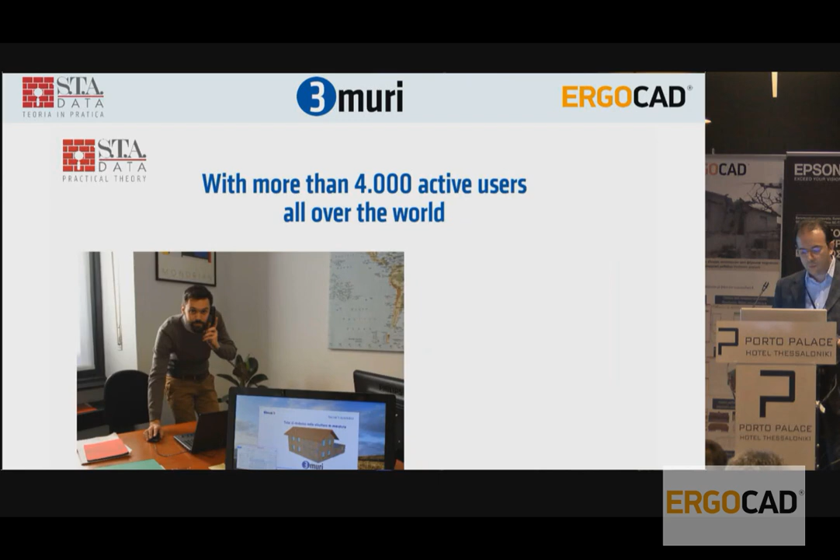Stadata was founded in 1983 by Adriano Castagnone, civil and structural engineer since 1978, and pioneer of scientific software for structural engineering. The company was born to provide civil engineering services and consulting. We have always had a particular interest in the evolving sector of IT, foreseeing the enormous opportunity of applying it in design and computation. Before focusing on software development, Stadata realized important projects both with private and state-owned companies.

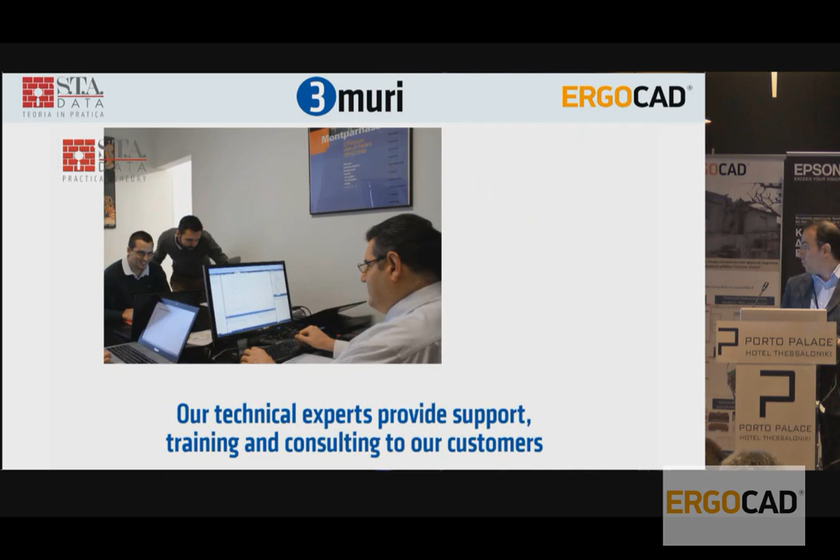That's our strength, because beside IT experts, we are professionals in structural design. The company is currently composed of 15 employees and several consultants, all highly professionally qualified. Thanks to the continuous development of work and collaboration with the university and professional world, it is always able to offer advanced and constant updates to its customers.

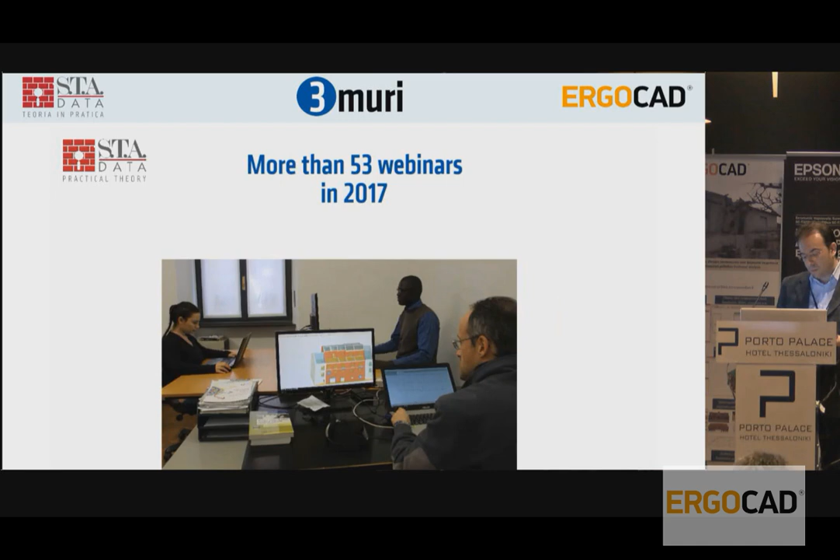Stadata applications allow you to face everyday work with simplicity and effectiveness. The company goal does not end with the search of new IT solutions. The offer of Stadata includes support, training and consulting services, including individual projects, so that the professionals are immediately operational. Thanks to the technical expertise and the state-of-the-art solutions, Stadata is a solution to the real problems of designers.

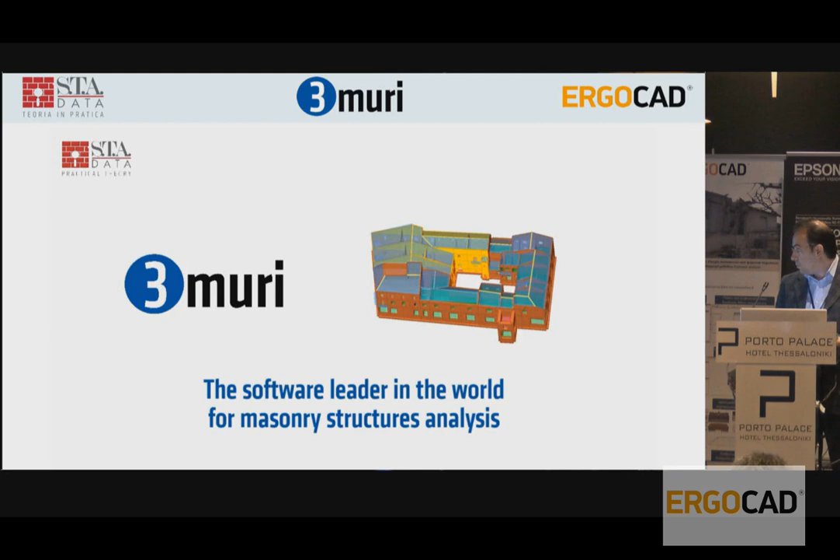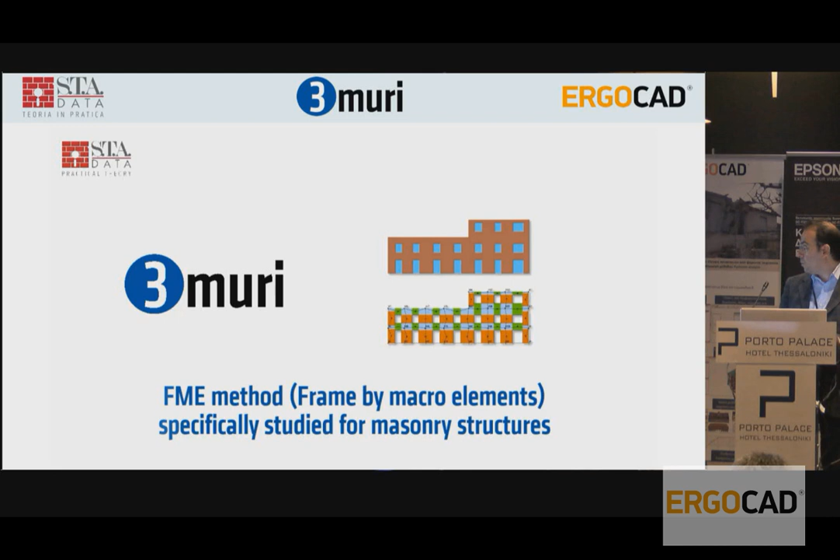3muri is the masonry structures analysis specialized software. It is the leader in the world. It is used for existing and new buildings. The software performs nonlinear pushover analysis. The mesh is made with the FME method, frame by macro elements, specially studied for masonry structures to better represent the behavior of masonry structures. Now the software is available in Italian, Greek, English, German, French and Albanian.

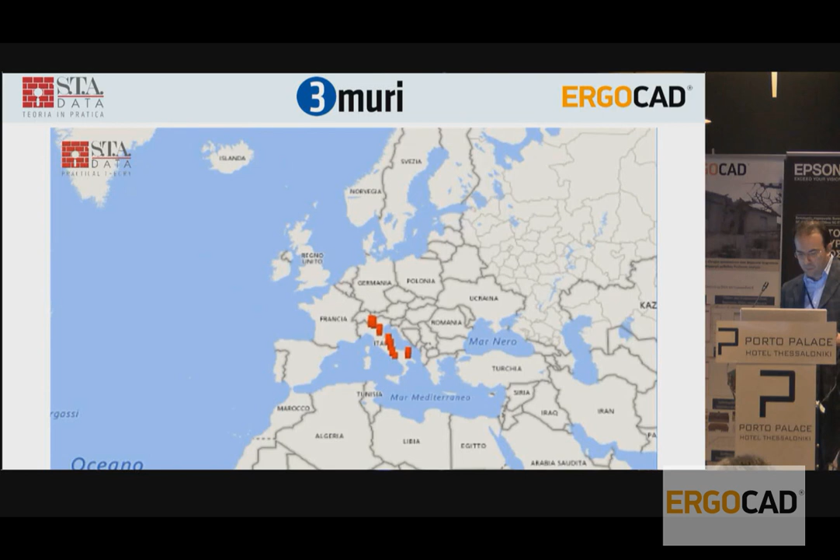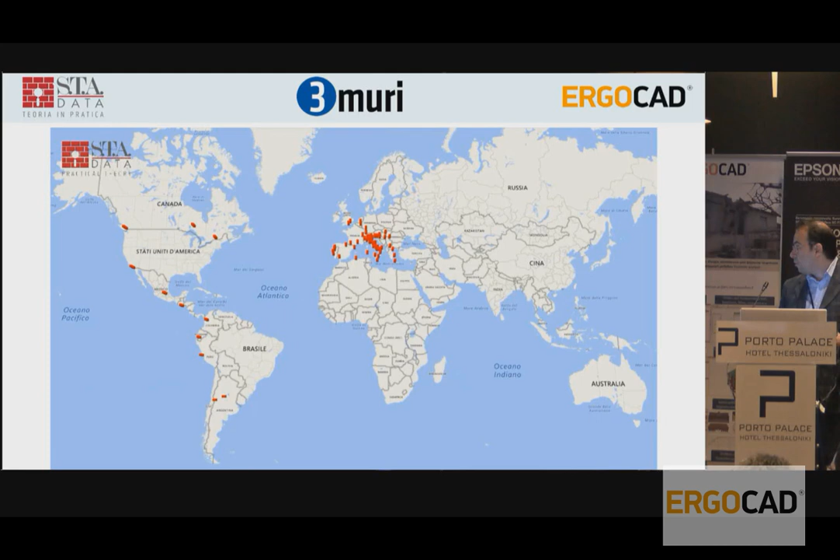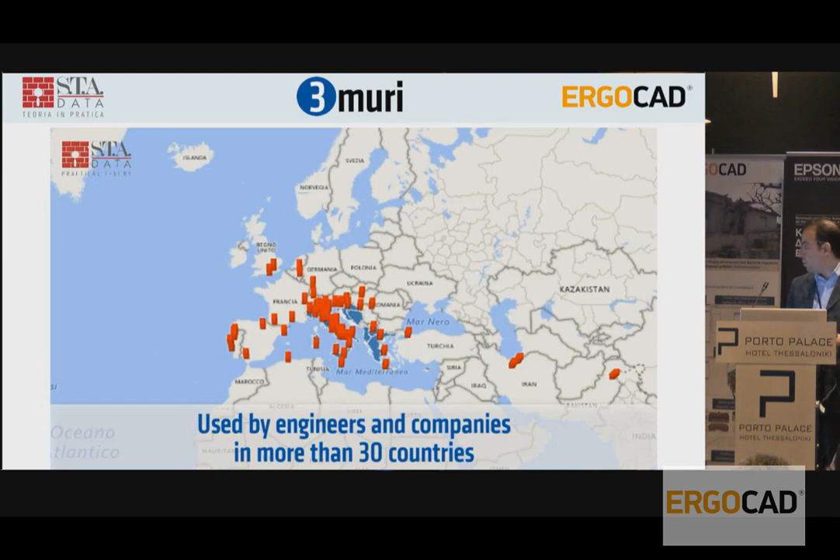And it performs analysis according to Eurocode 6, Eurocode 8, the Italian National Code, and the Switzerland National Code. 3Muri takes origin from Professor Lagomarsino's academic research, and actually it is used for this purpose in more than 80 universities. Engineers and companies that use 3Muri for professional purposes are widespread in more than 30 countries.

Okay, thank you. So now we have seen what we have done till now, and this is what the future is bringing. Because today we are going to speak about building information modeling, the new approach for modeling for structural engineering, but also for the whole procedure and whole process when we have to do something about constructions.

So what we are talking about today is the approach that we have made for the masonry structure itself. So we can talk about the process that can be done for a masonry structure building. First of all, we can start from the IFC model, the BIM model produced by architectural software. And then we can move to smart plans, creating plans in the software with the sections that include all the information needed to create the masonry structure.

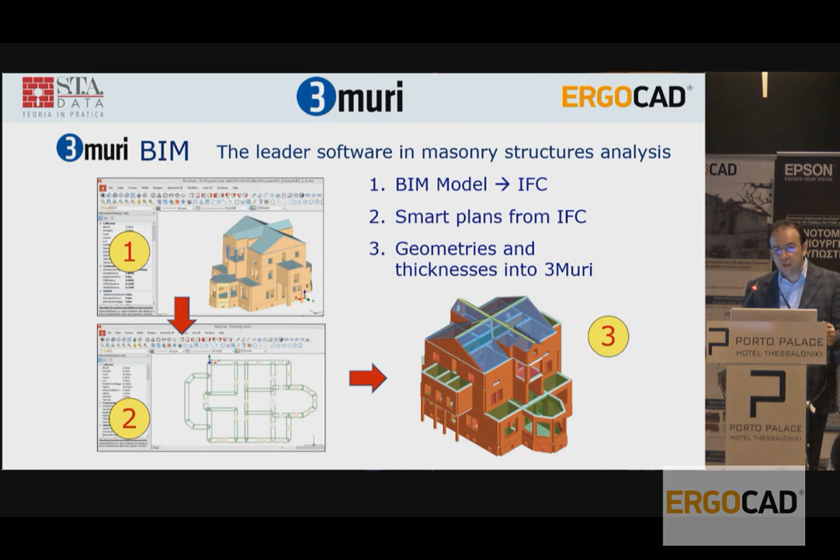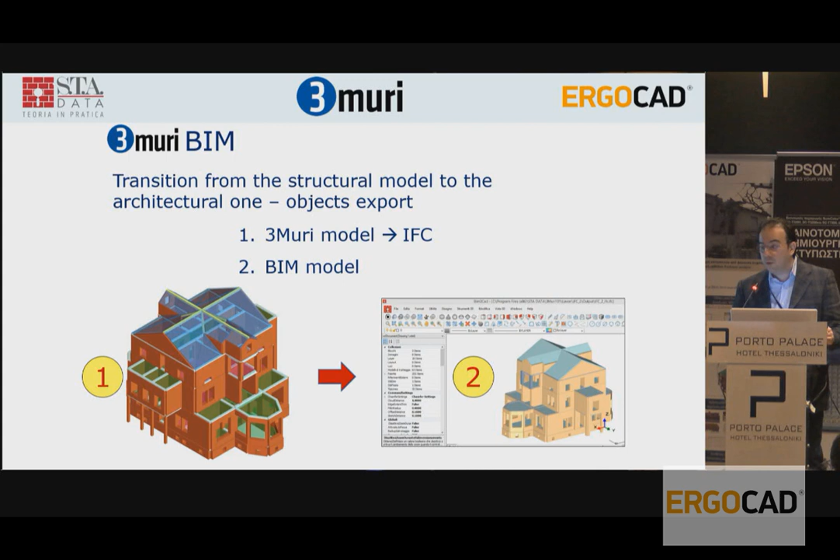So what we need now is the position of the walls, their thickness, their material, and the position of openings in order to create the correct mesh. And then we can create from this information the correct calculation model for a masonry structure. And then at the end we can go back through the IFC models and send the information back to the architectural procedure. So we can start having a look at how this procedure can be done in our software 3Muri.

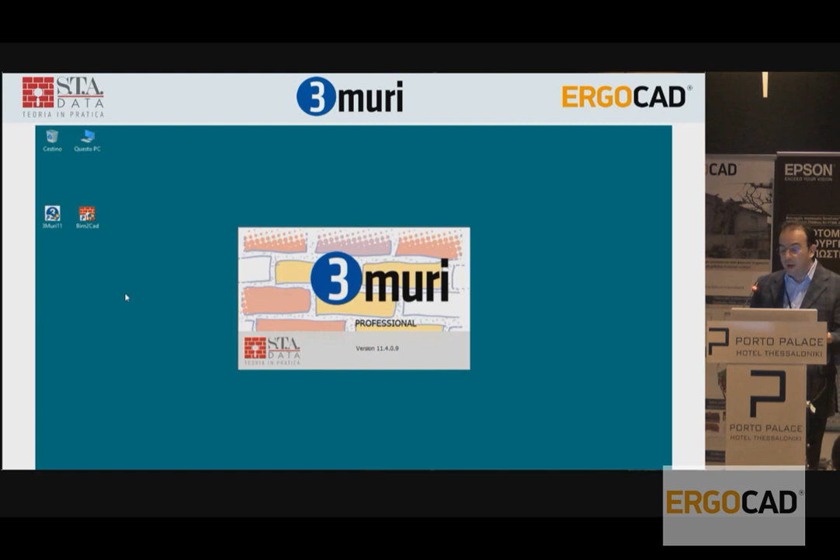Also in this case, we can start by opening our software 3Muri, so we can see what the interface of the software looks like. It's very simple because we're starting from a blank page, and then first of all we have to create a new model.

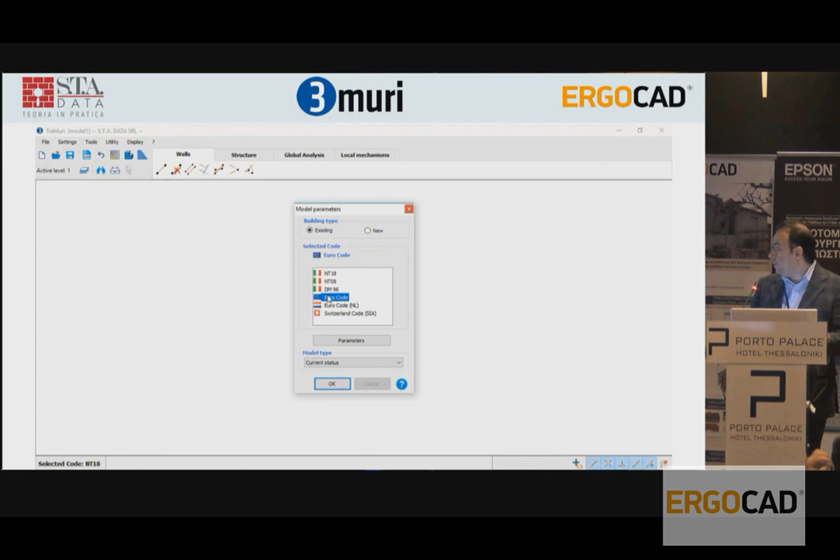So we select New, giving the model a name, and then first of all we select which code we are going to use. In this case, this is the Eurocode, whether the model is an existing one or a new one, and then we select OK.

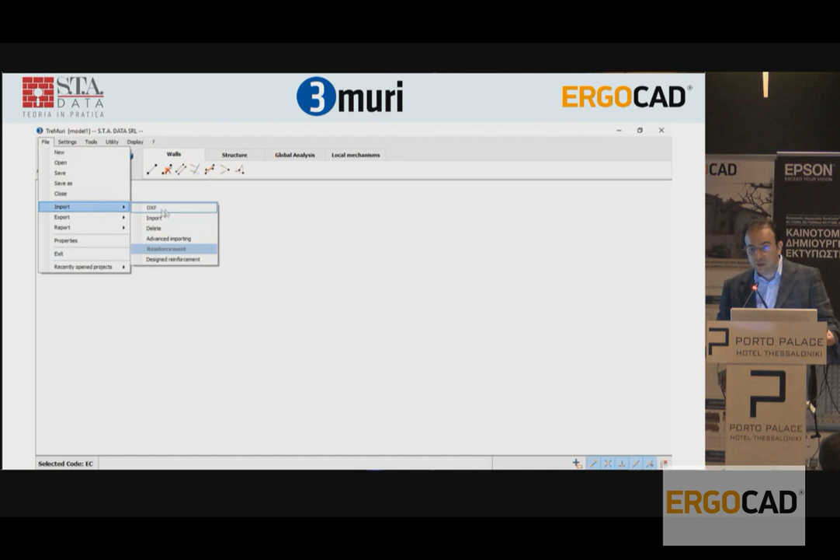What we usually do is import a DXF plan with almost every information that derives from a CAD software. What we are going to do now is import the same plan, but from an IFC file, so the plan can start to be a smart plan.

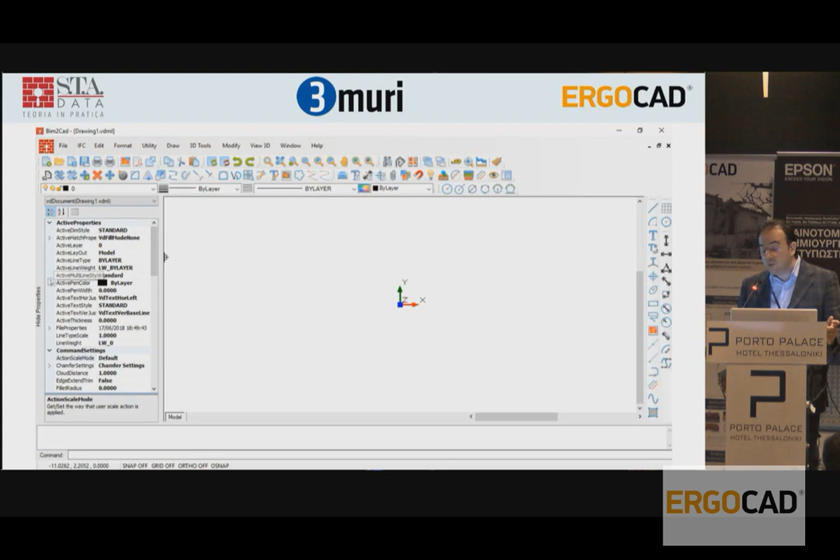So we can open BIM2CAD. This is a CAD that everybody knows, so you can draw lines, you have layers, you have views, you have all the things that you are used to doing in a CAD software.

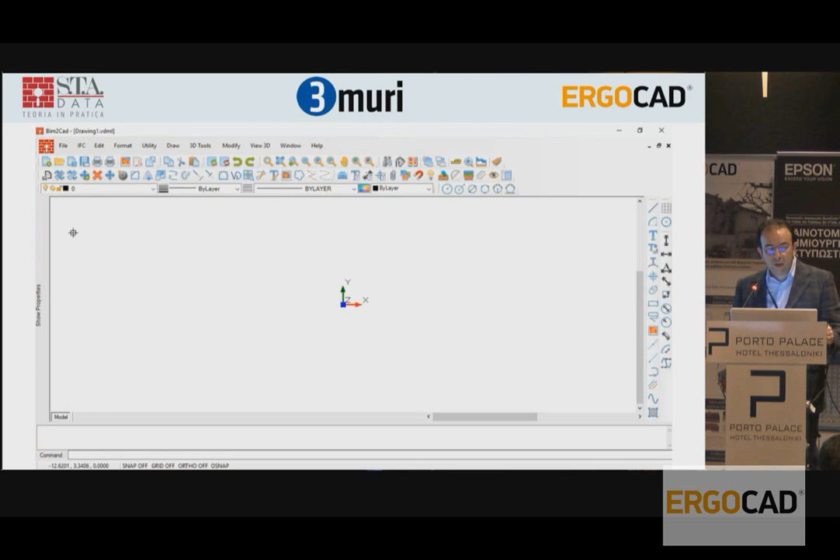But what we have more is the IFC possibility, to import and export IFC files and to manage them, creating sections and views and so on. So we can start from the menu, importing an IFC model.

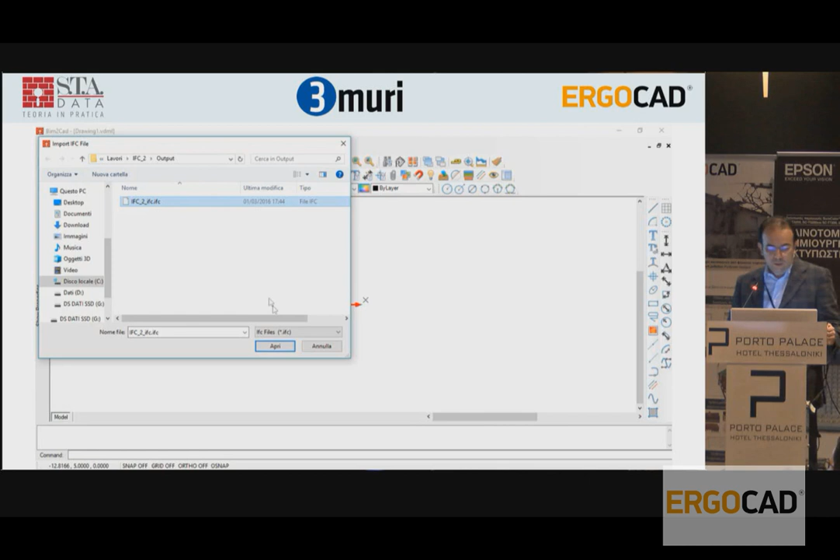Okay, so it's loading the model. This is a masonry structure, a school nearby Torino. And as you can see, it's made by columns, beams, walls, roof slopes, and so on.

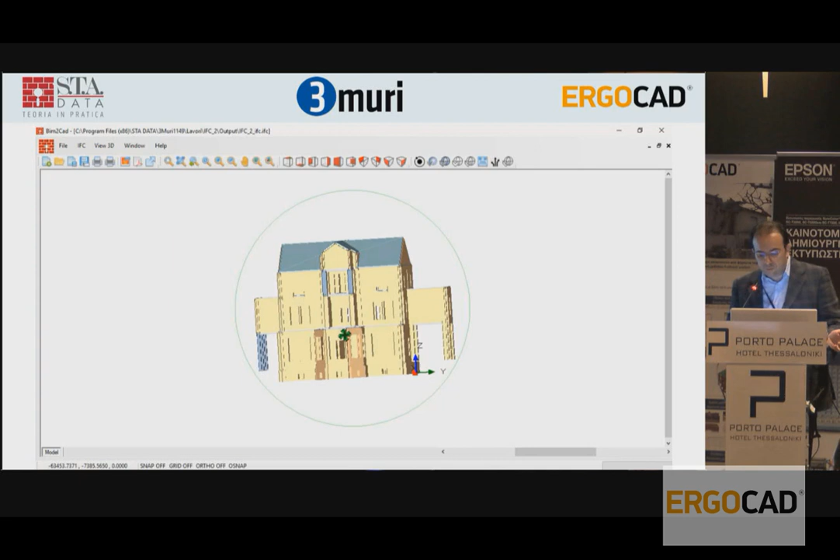So something not so large, but with a lot of elements inside that can be transferred into the 3Muri model. So what we can do here is create smart sections.

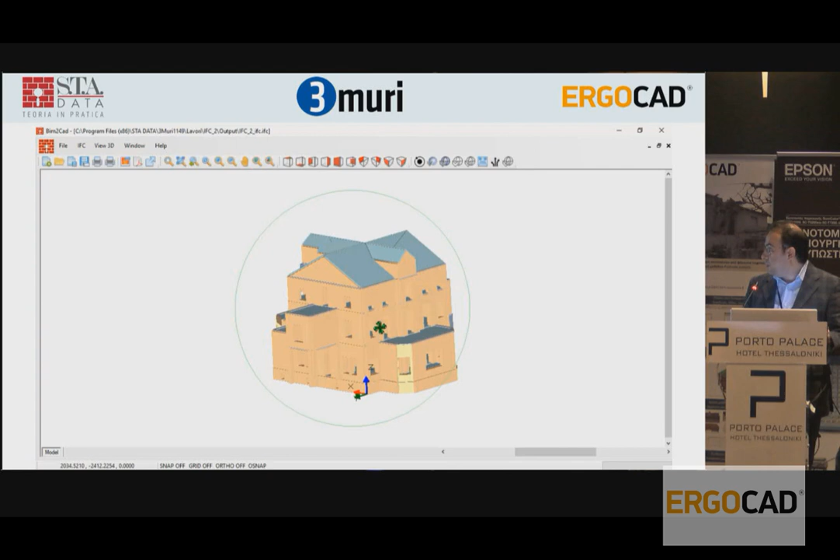So we can now go to the IFC menu and select the procedure to create the section. We can create horizontal and vertical sections. At the moment, what we need is a horizontal section, so we select the height of the section in order to create the right plan.

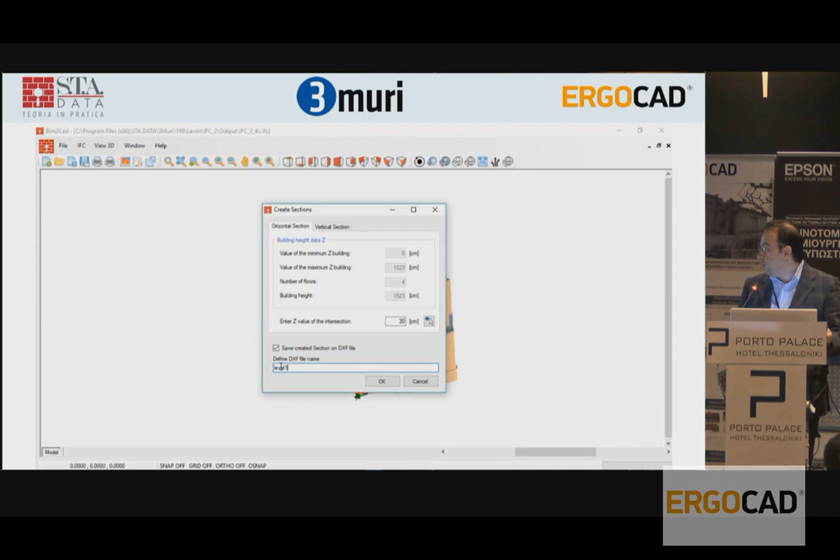So now we created the section on the first level, and then we directly save it into the folder where we have created our 3Muri model, so we can find it easily when we come back to 3Muri.

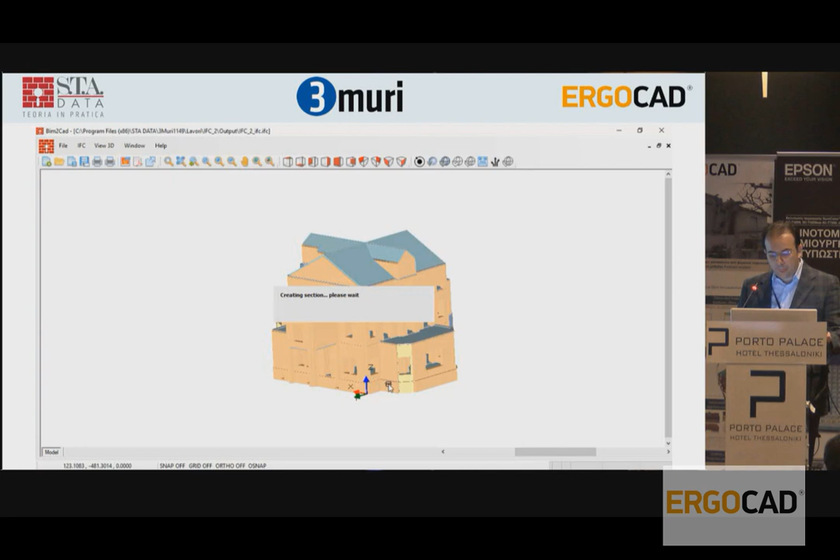The software now creates the plans. In these plans, we will see the axis of the walls, so we can easily know where we have to design them into the software.

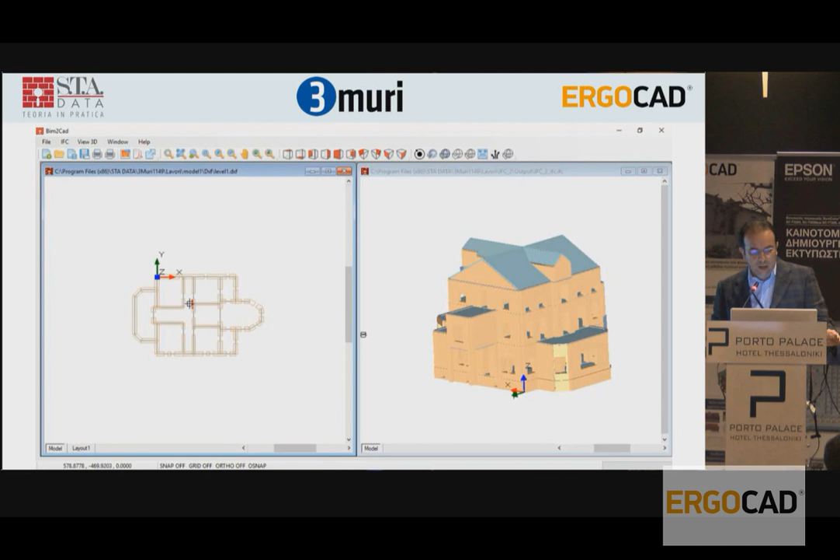We can see the position of the openings and the thickness of the walls. These are the main information needed in order to create a model into 3Muri software, or better, a masonry model for a structural analysis.

So we can now go back to the software 3Muri and see how the import could work inside the software.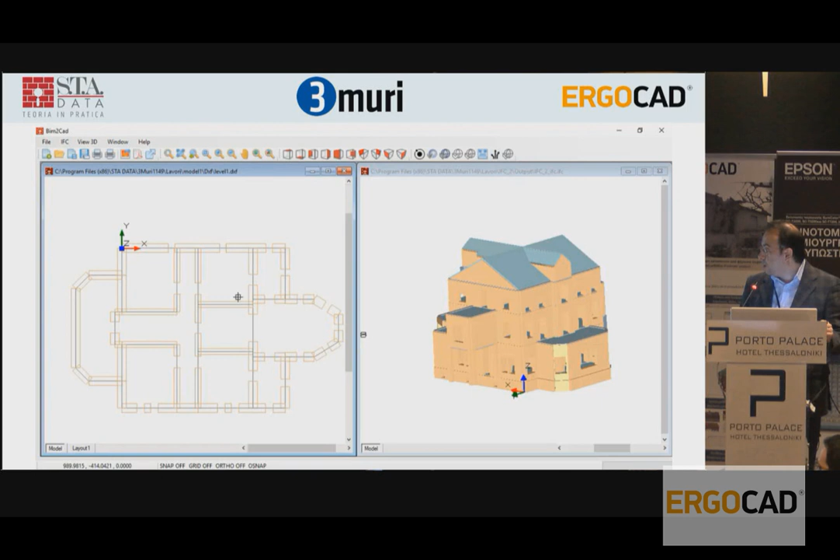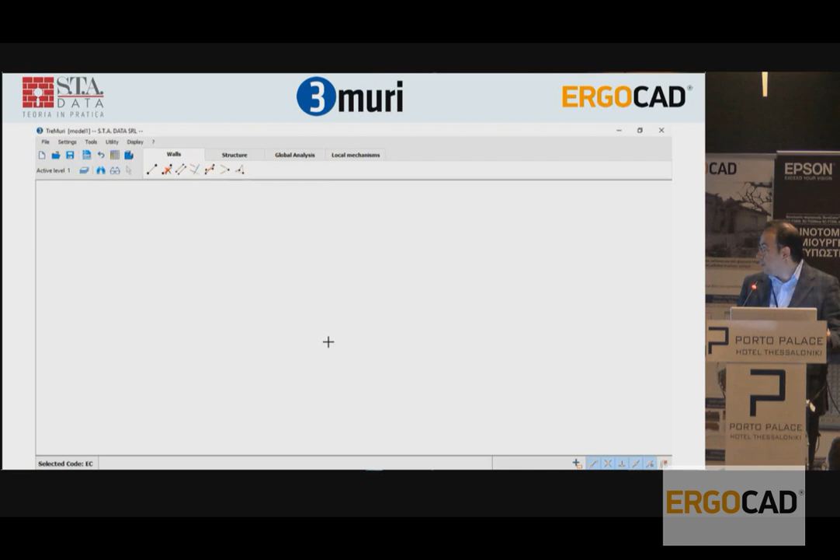Okay, so now we can start with a normal import for the DXF files, and then we will have all the information that comes from the IFC model.

So we select the import manager. This is the DXF we have created into BIM2CAD, and this is the scale of importation.

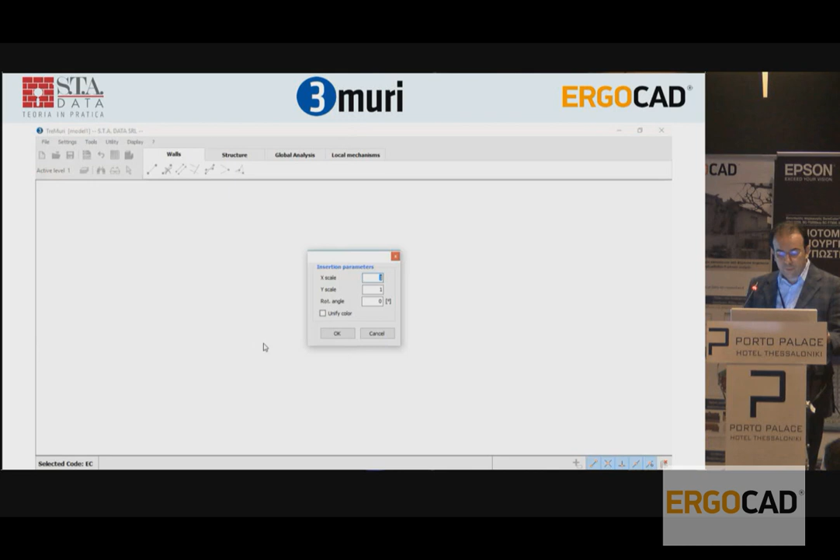So now we can start recreating the model into 3Muri with all the information that comes from the IFC model.

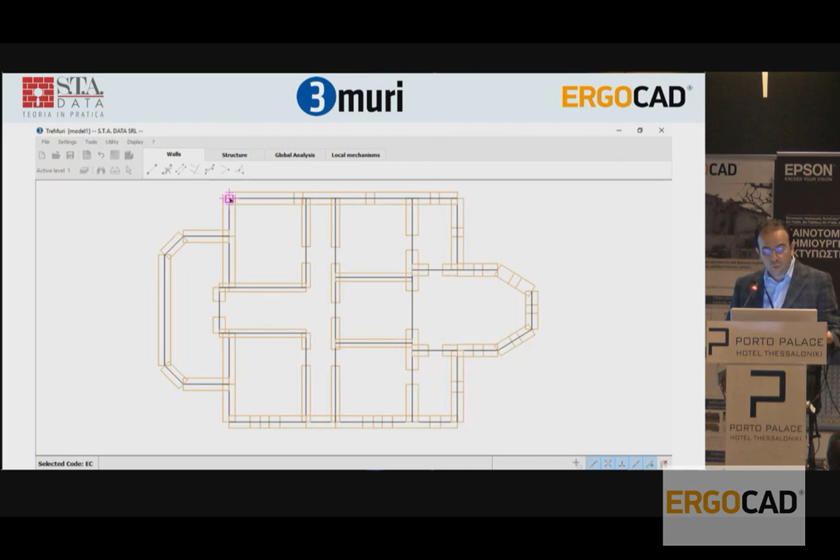So we can easily create the axis of our walls. These are the most important part, because this is the real structure that generates the mesh into the software, because these axes are the reference for all the structural elements that will be designed into the structural model.

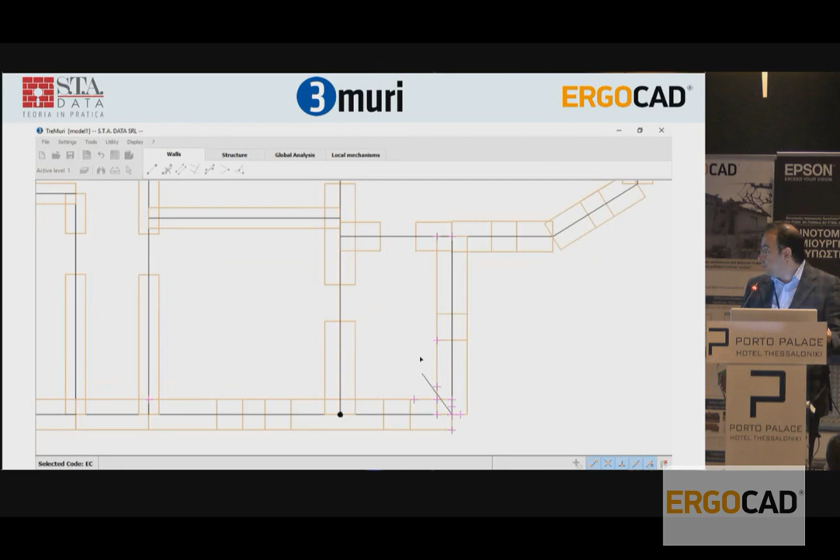So we can go on and recreate with simple snaps all these walls, and automatically the software creates the corresponding nodes at the intersections and all the structural references that are needed.

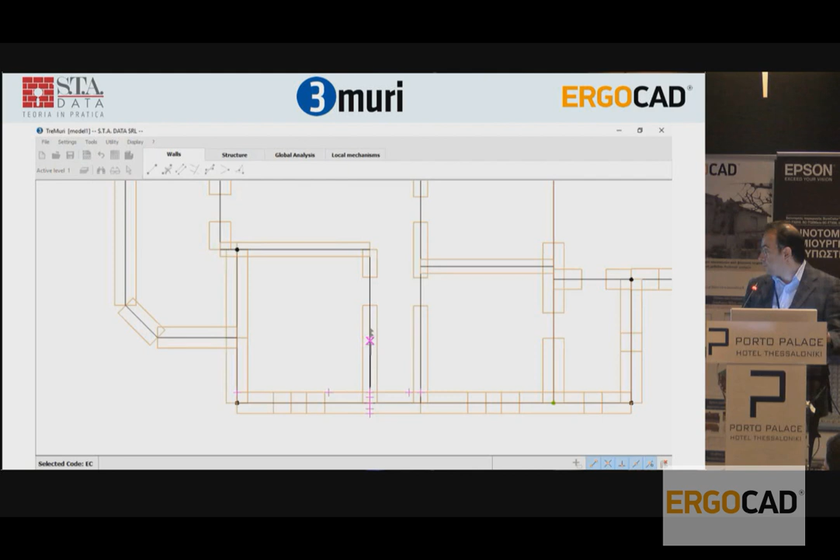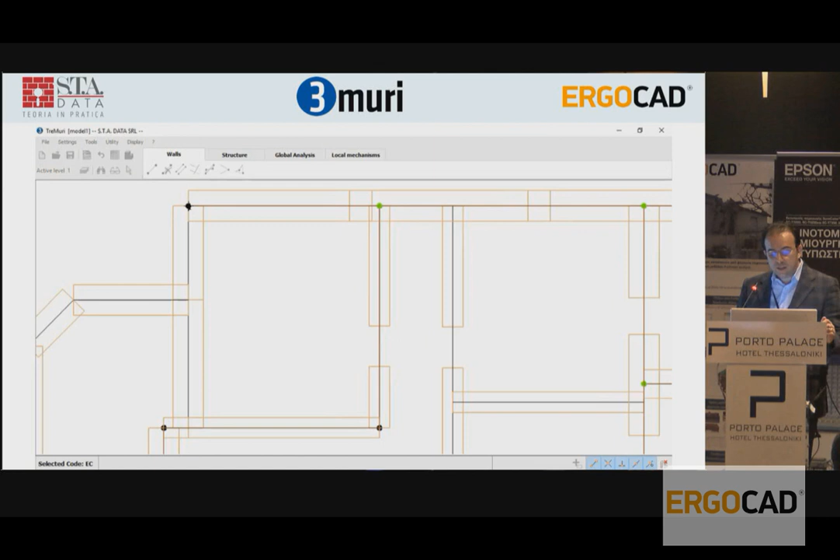In 3Muri, it's very important to create these axes in the right position, also for the masonry analysis, because all the walls that are on the same axis will collaborate during the calculation. So this is an important part of modeling.

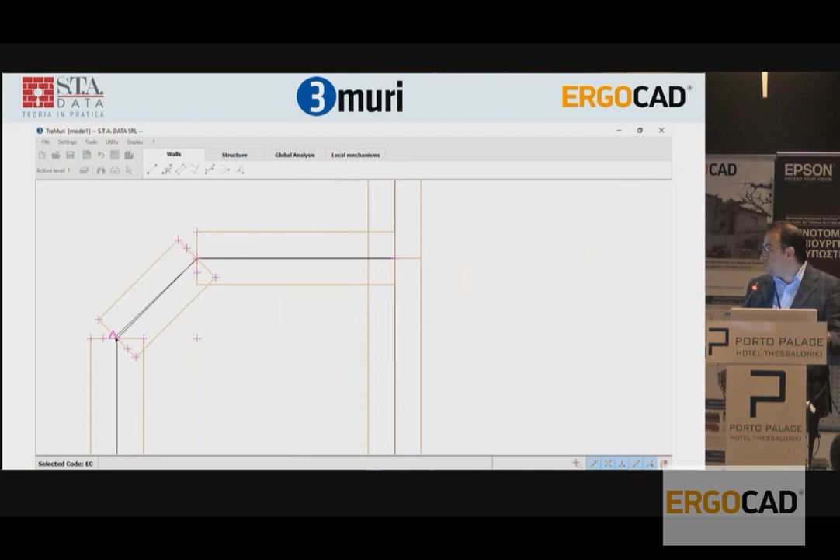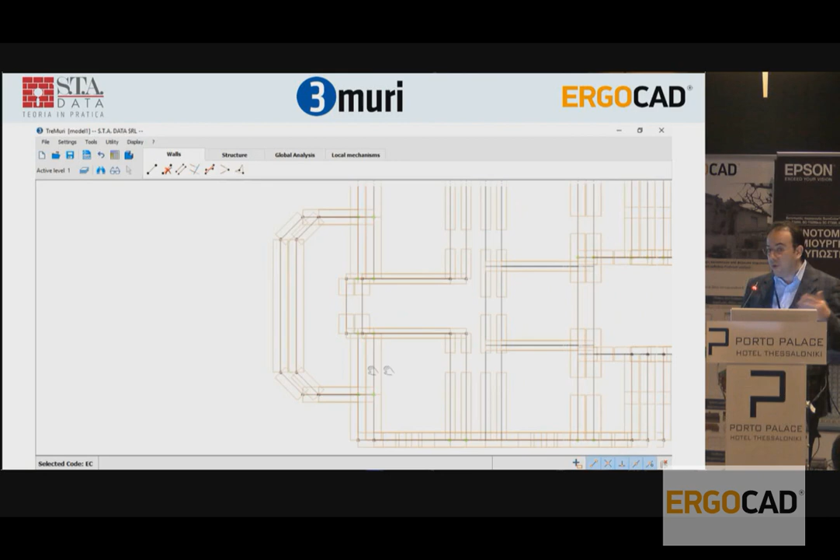It may seem easy, and it is easy because 3Muri is easy, but this is an important part of modeling, because all these axes will represent the direction in which the seismic action will be distributed.

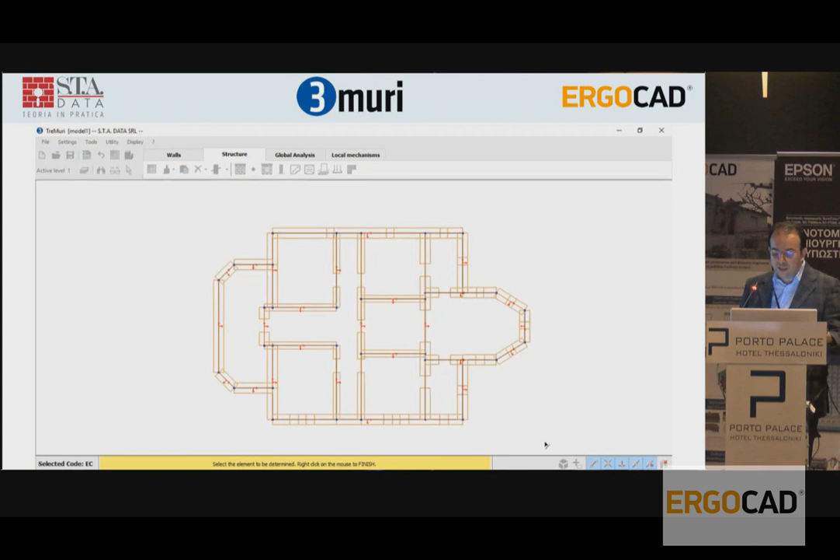into our numerical model. So now we can go through the structural part and select all the walls and assign them a material and initial thickness, just to create the model in 3D and have a view of it.

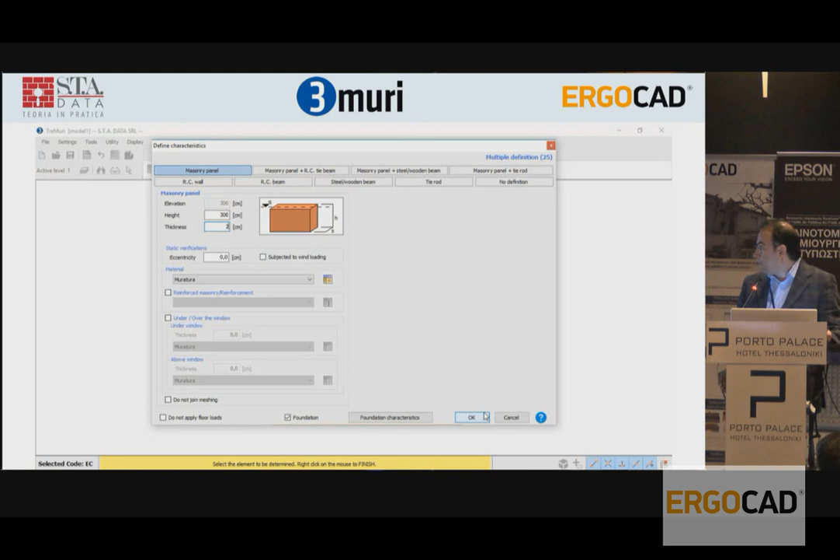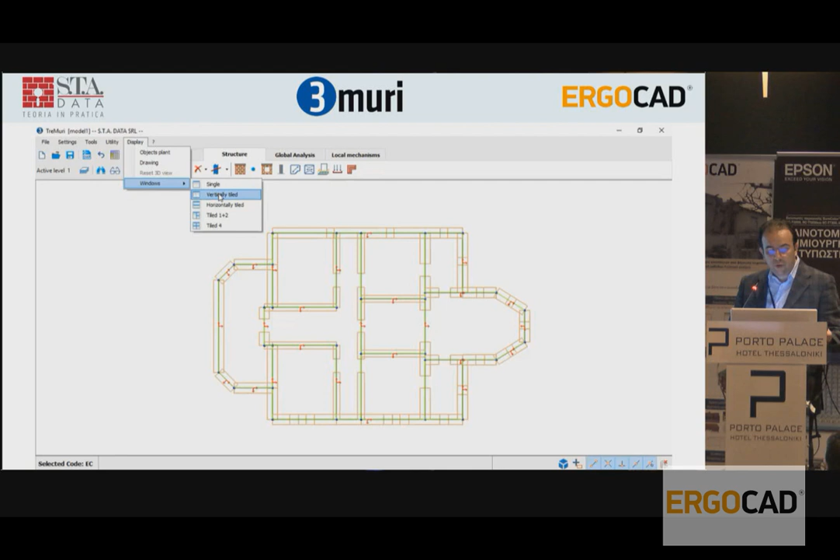So we have assigned the material and the thickness. Then we can split the view into two windows, so we can see what we have created in a 3D view and in plan.

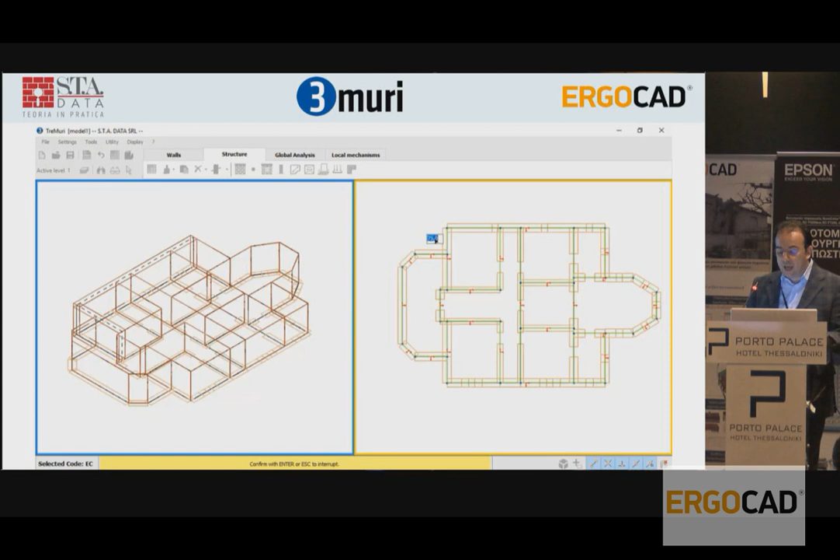Now we are creating only walls that are structural, but only 2 centimeters thickness. Then we can also insert the real thickness of the walls with the added thickness tools. Just going through the walls with a line, the software recognizes the thickness imported by the IFC module, and the walls are automatically created also into 3D view. So thickness and position, the main information imported by IFC, are now used to easily and quickly create the structural model. The recognition is automatic.

In these tools, you can also select a reduction of this thickness for the architectural part that should not be modeled into the structural model in 3Muri.

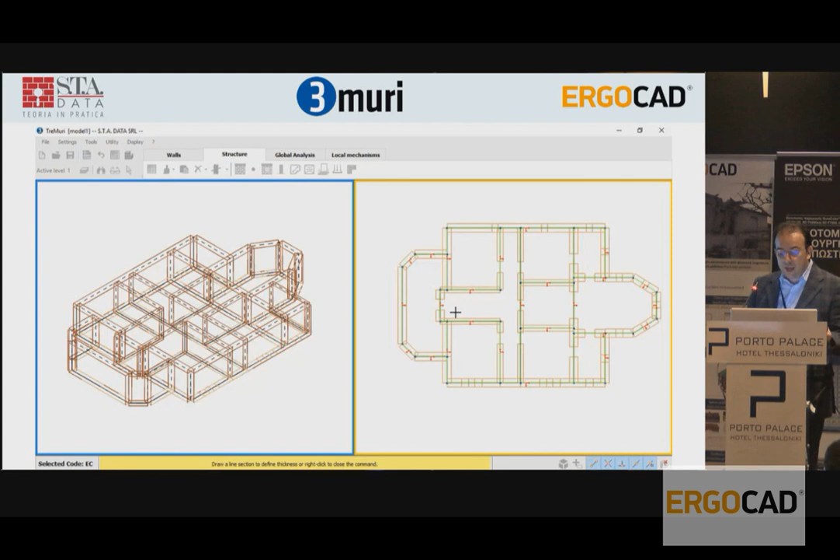Then, when we have finished creating all these walls, we can pass through and create all the openings. Also in this case, we can use snaps and the positioning that comes from the IFC file. This is a view of what we have created. Now, with the two-point insertion, we can easily snap to the structure, and the openings are created automatically in the plan and also in the 3D view.

So we can always check what we are doing in the 3D view and also what we are doing easily in the plan inserting interface.

This is a very important part, because when we create the mesh, the position of the openings, the thickness of the walls, and the materials are the three most important pieces of information in a structural model for masonry and also for all other structures.

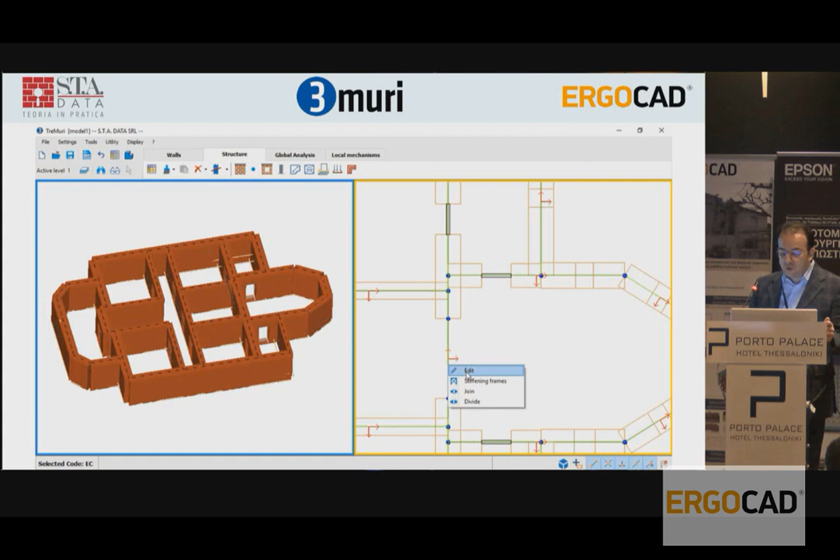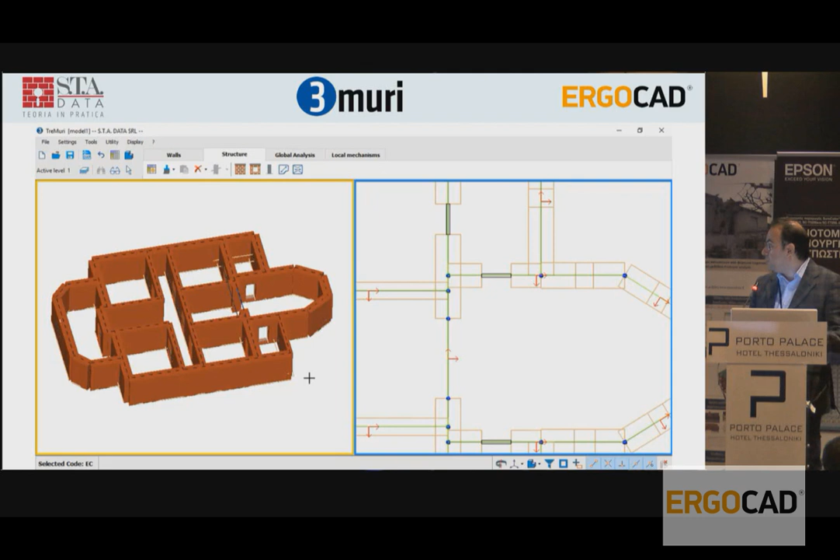So now we have created this part, and this procedure can be easily used also to change the definition of some part of the structure. In this case, for example, here we don't have a wall, but a steel beam. And we still have the correspondence with the snaps.

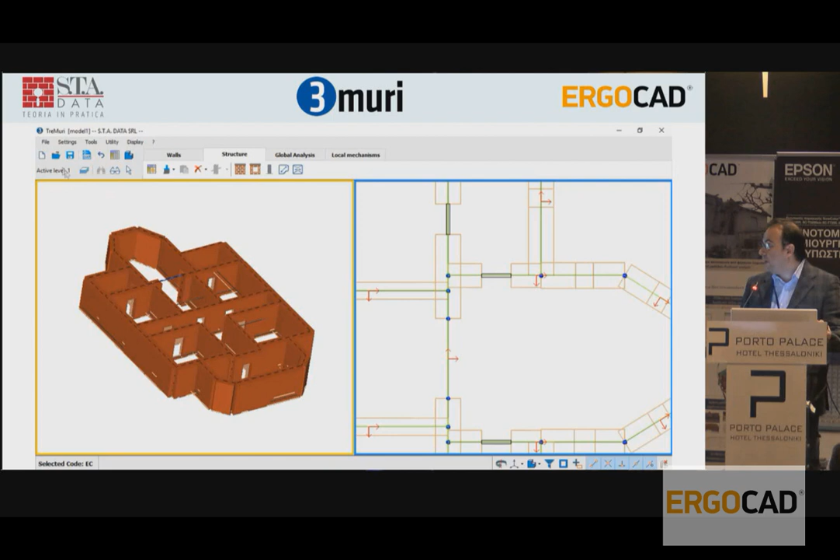So now we have created, in a very, very quick way, the first floor of our building. And then we can go on with the same procedure for all the other floors, or if we have a regular structure, we can duplicate this floor and create all the other ones.

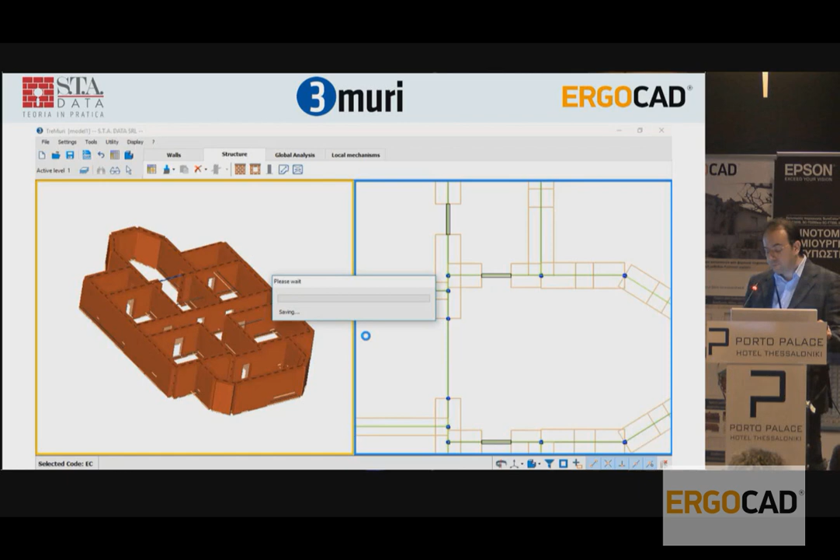Now we can open the finished model, the same one that we have created before. So this is the model after all the levels are modeled. It's very similar to the one we are creating from the IFC files.

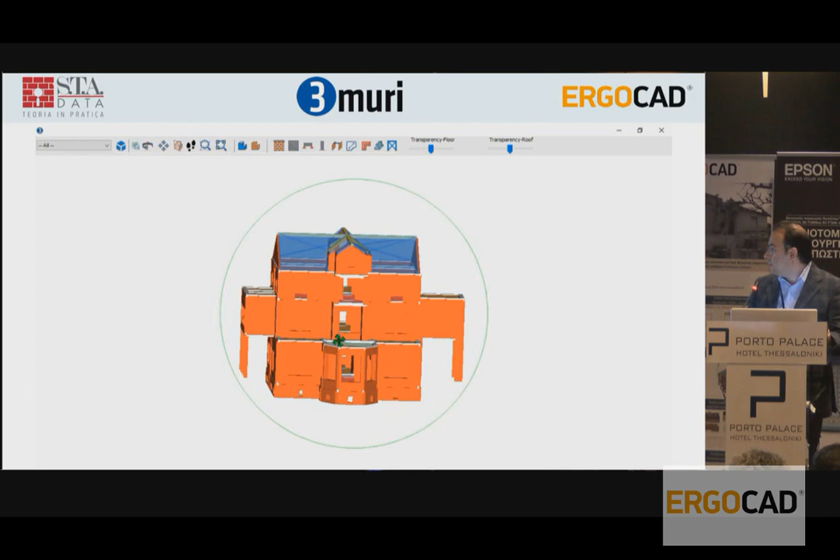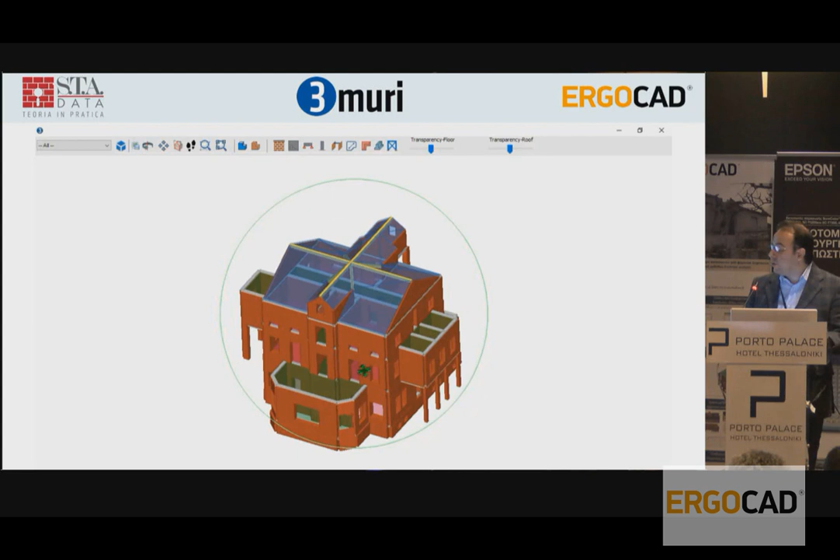And you can see that all the openings are here, all the elements are made very, very quickly. Then we can finish our procedure by passing through the creation of IFC files of the structural model.

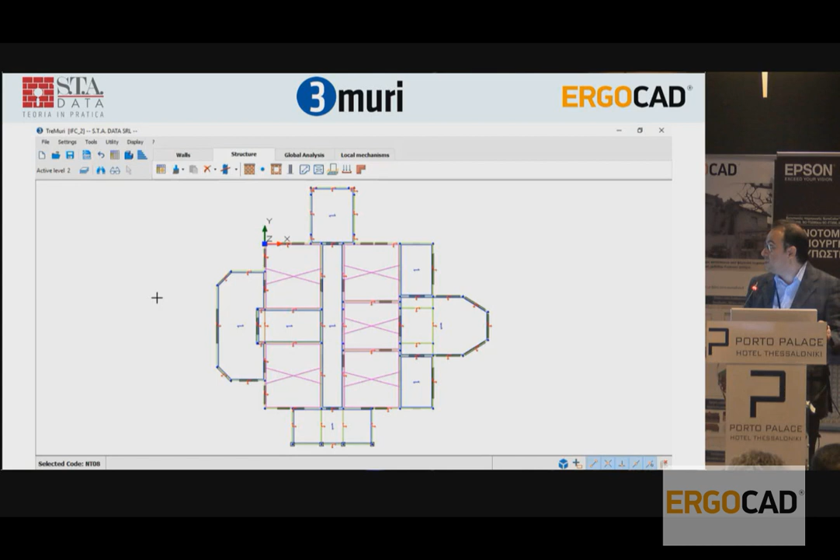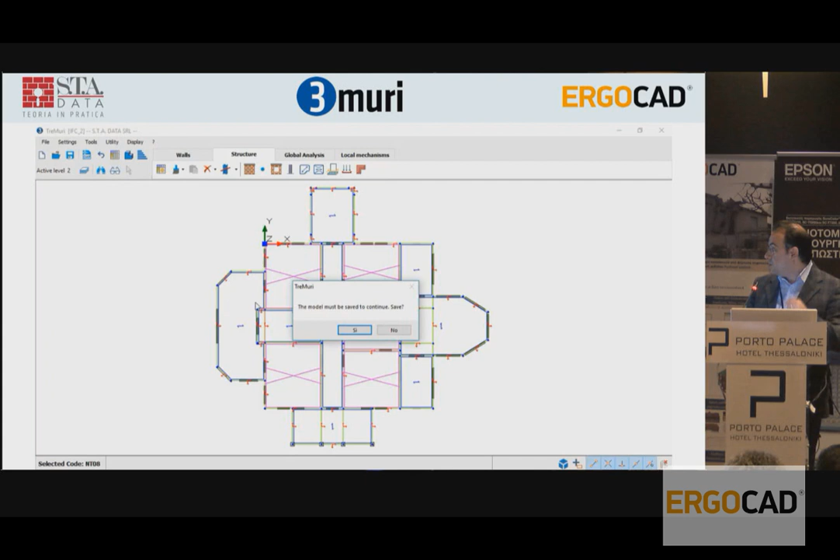So we can go back to our model and proceed with something very easy, because it's just like saving the model. We have to select the way we are going to save it. So we go from export to IFC, and we will create the IFC model directly from the software.

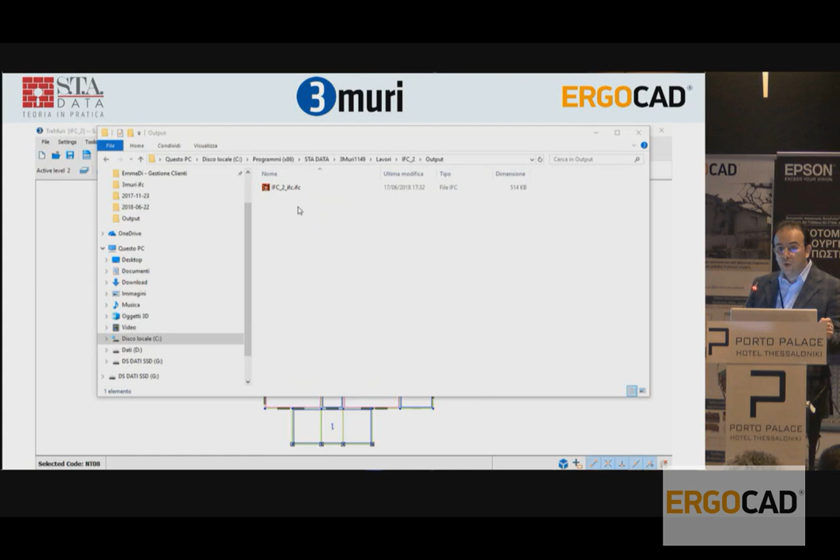The IFC is an open format, so we can export it and share it with all the other engineers that use maybe other software.

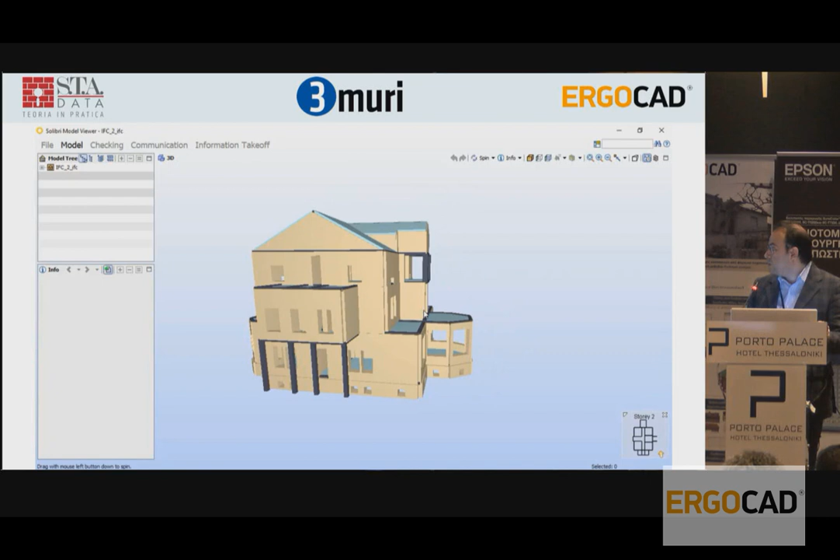For example, now we can check it with the Open Viewer Solibri, and this is the final IFC export. So all members are here, so 3Muri has exported the walls, beams and columns with the materials, geometry, and positioning in the space.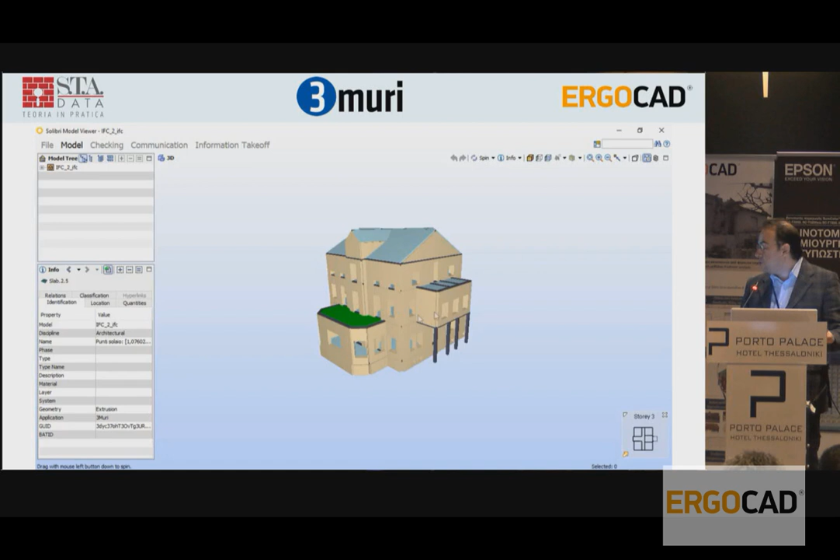So this is what we wanted to show for this introduction to BIM modeling, and what we suggest is the first step for the future method of producing computational modeling through IFC and through sharing information between all the technicians that collaborate in the creation of a new building or in the retrofitting of an existing one.